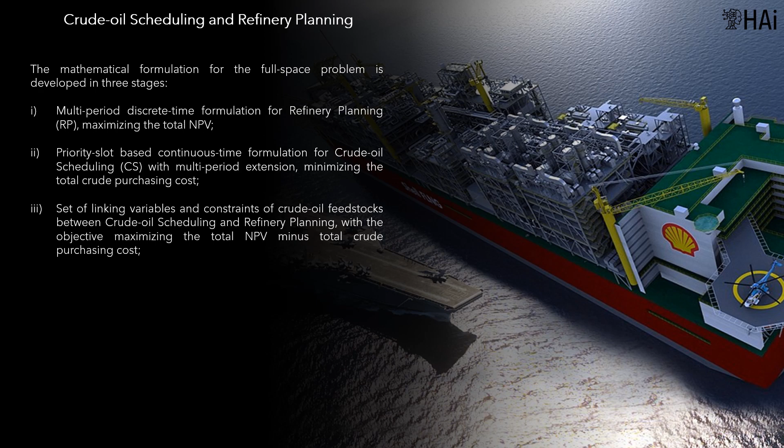And a set of linking variables and constraints of crude oil feedstocks between crude oil scheduling and refinery planning, with the objective of maximizing the total NPV minus total crude purchasing cost.

The custom indicates that the most common position, when formulating a mathematical model, is an integral formulation, full space, which brings together in a single formulation all the equations that define the problem. This corresponds to a top-down approach. In this case, the model could be called the Crude Oil Scheduling and Refinery Planning Model.

However, considering the evolution of computational power and algorithms, today an ascending formulation is indicated, starting from the atoms, that is, from the basic parts of the problem. This corresponds to a bottom-up approach.

The case presented is a good example of this approach, dividing the problem into 2 formulations: the Crude Oil Scheduling Model, and the Refinery Planning Model. These formulations are integrated to form the holistic model.

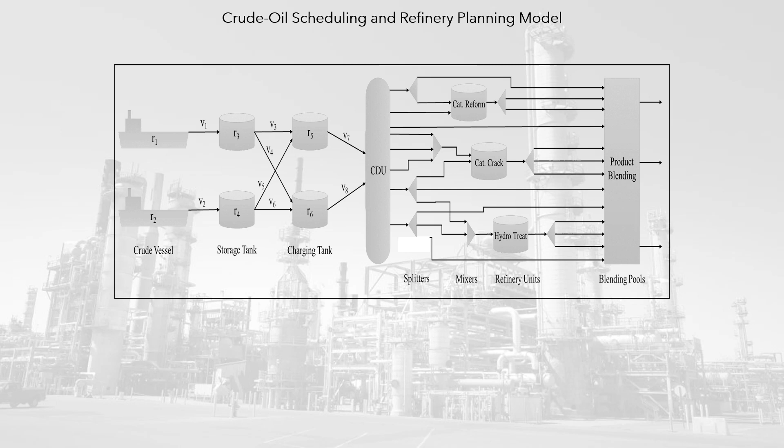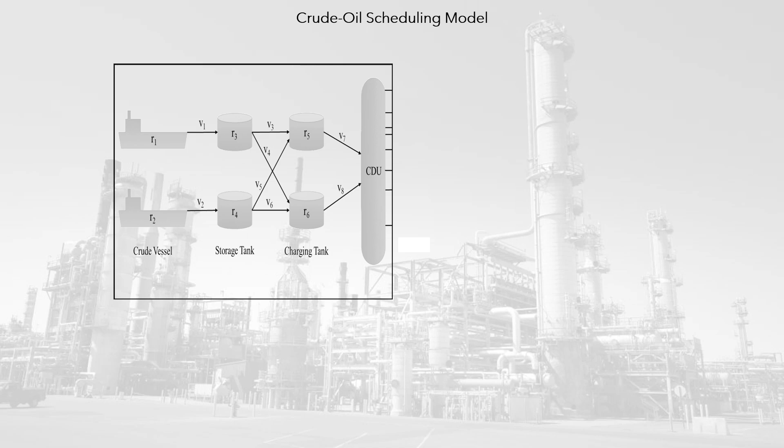The Crude Oil Scheduling Model represents the first part of the process. This type of scheduling problem is usually formulated as continuous time models, which facilitates the coordination of activities exactly at the instant level. The Refinery Planning Model is more oriented to the use of discrete time formulation, since it involves the planning of activity volumes in multiple process units by periods. Proper handling of these 2 formulations is easier under the divide and conquer approach.

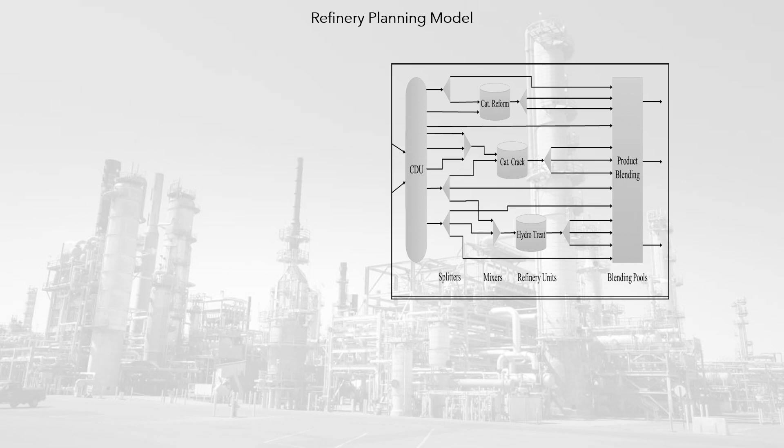The graph shows the flow rates in the simplified refinery planning example. The goals of the 2 models are crude oil scheduling and refinery planning.

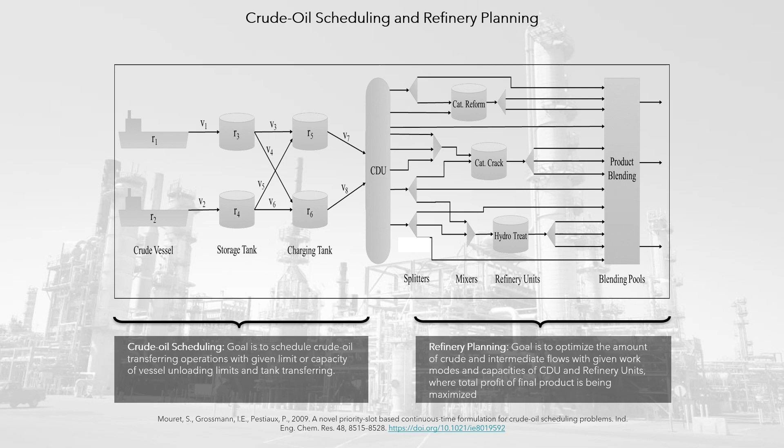The goal is to schedule crude oil transfer operations, with a certain limit for ship unloading capacity and tank transfer, and refinery planning. The goal is to optimize the amount of crude oil and intermediate flows, with working modes and capacities given for the CDU and the refinery process units, where the total benefit of the final product is maximized.

The crude oil scheduling model is a continuous time non-convex MINLP model, based on priority slots. Its main features are given vessel arriving and leaving time, tank inventory management, CDU charging continuously through time, and non-overlapping inlet and outlet transferring. The key variable is the binary variable ZIV, that represents the assignment of the V operation to the priority slot I.

The key constraints are: time decisions in each time slot must have consistency, non-overlapping operations not in the same slot, non-overlapping time decisions ensured by big M type constraints, nonlinear crude composition constraint for each slot I, crude C, and outlet operations V, and other mass balance constraints. The objective function is the crude cost.

The key constraints are: time decisions in each time slot must have consistency, non-overlapping operations not in the same slot, non-overlapping time decisions ensured by Big M type constraints, nonlinear crude composition constraints for each slot I, crude C, and outlet operations V, and other mass balance constraints.

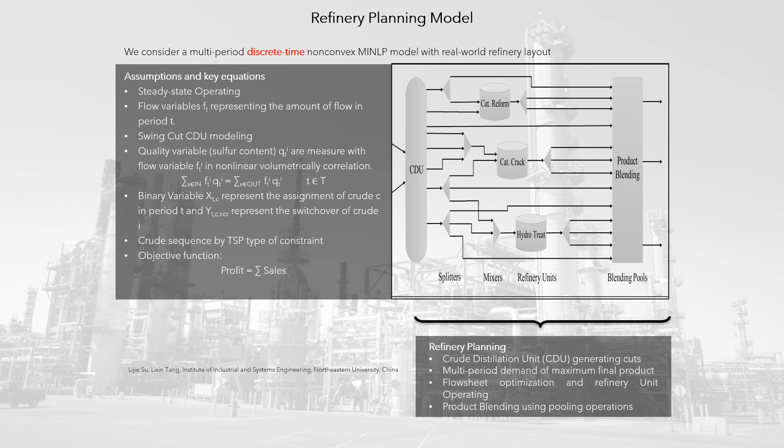The objective function is the crude cost. The integrated problem, or full space problem, is a non-convex MINLP.

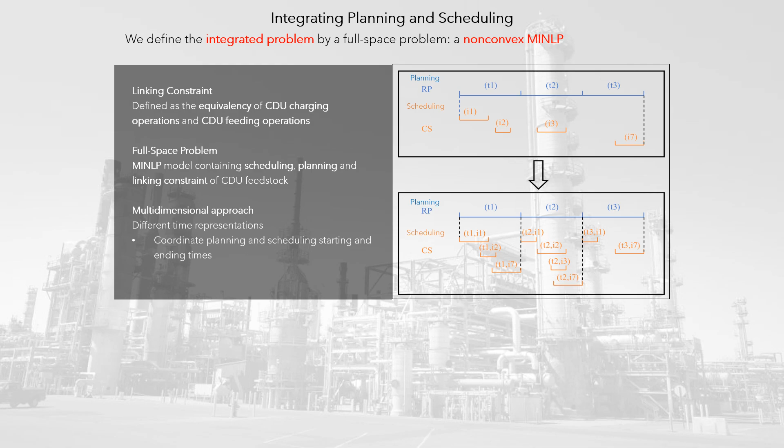The full space problem is an MINLP model containing scheduling, planning, and linking constraints of CDU feedstock, with a multidimensional approach using different time representations to coordinate planning and scheduling starting and ending times.

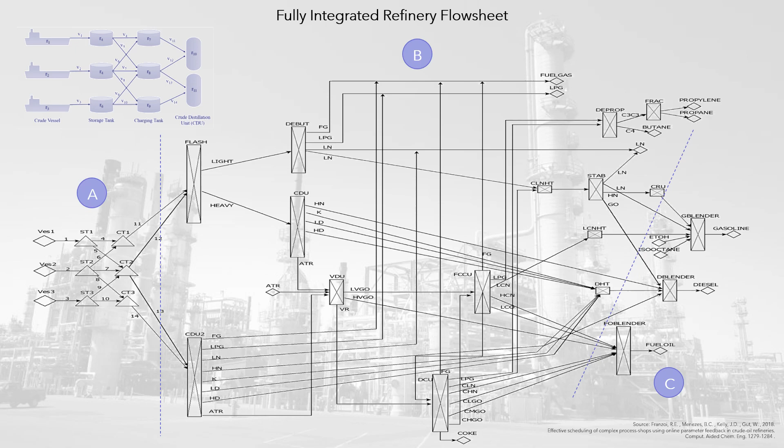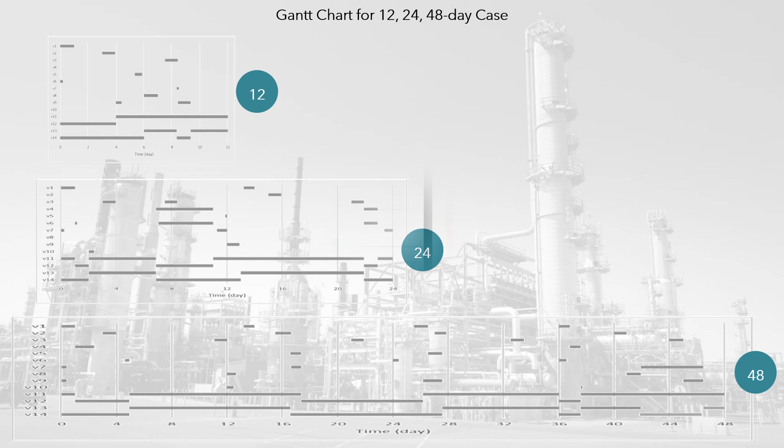Three different solution approaches were studied. The monolithic approach solves the full space model using state-of-the-art MINLP solvers.

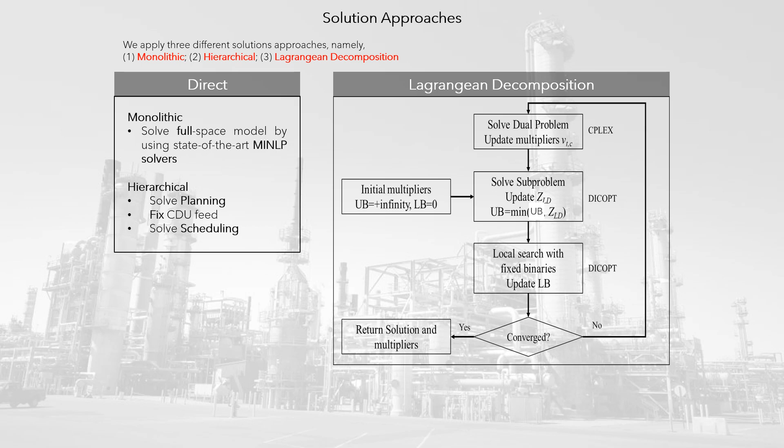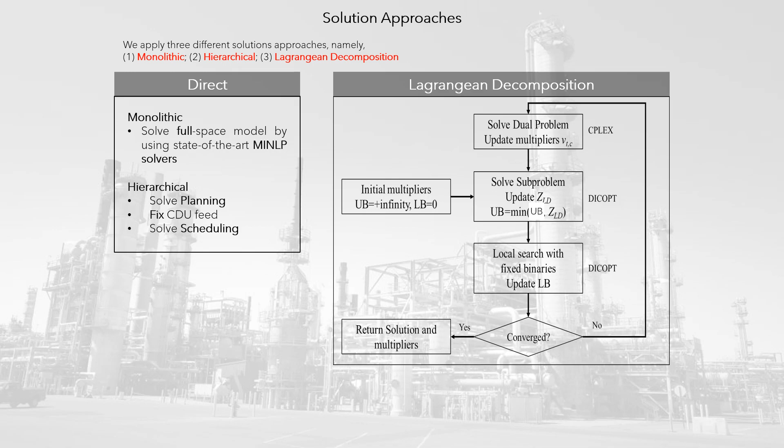The hierarchical approach solves sequentially the two sub-problems: CS, crude oil scheduling, and RP, refining planning. There are two possibilities: the proposed method solves planning, fixes the CDU feed, then solves scheduling; or Lagrangean decomposition.

For the monolithic approach, the different alternative solutions come from the state-of-the-art MINLP solvers used.

For the hierarchical approach, the sequence of solving the two sub-problems, CS and RP, is a key decision. Both methods are tested in 3 cases and the computational results are presented in Table 10.

The two options are stated as scheduling-planning and planning-scheduling, which explicitly represent the sequence applied for solving CS and RP. The objective value is determined by the sum of the individual CS and RP objectives.

This process could be improved if cycles are incorporated to achieve convergence.

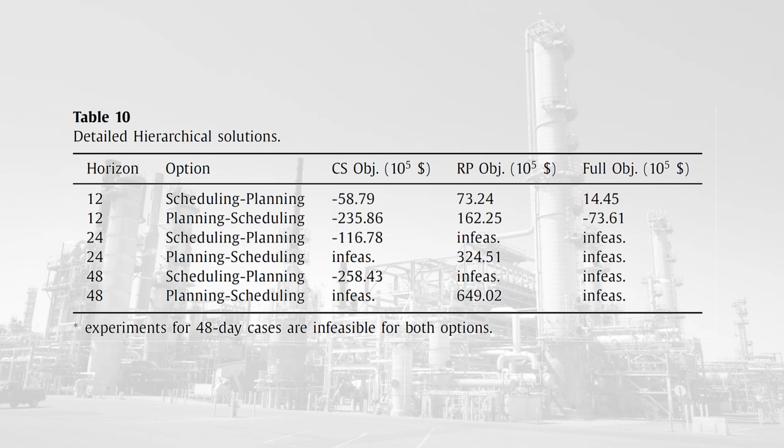This can be considered a primal-dual algorithm that uses an improved subgradient formulation for the dual problem by exploiting a trust region approach.

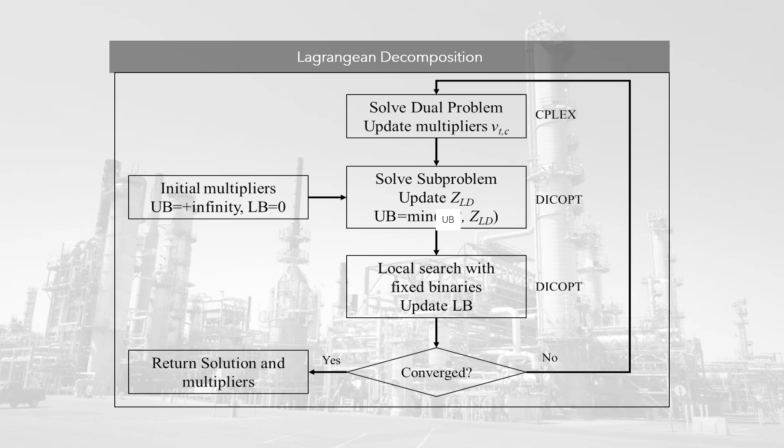Because of the non-convexity of the problem considered here, strong duality is not guaranteed, and therefore there might be a gap between the global optimal solution and the Lagrangian dual, which this algorithm may not be able to reduce to zero. The overall solutions of the 3 cases, 12 days, 24 days, and 48 days, are presented in the table.

The objective functions for both the monolithic and Lagrangean decomposition approaches are larger than for the hierarchical approach, by 75%, 60%, and 6% for the 12 day, 24 day, and 48 day cases respectively, corroborating their advantage.

Moreover, the proposed LD approach requires less CPU time, converging to a small 1% to 5% optimality gap, when compared to the monolithic approach using state-of-the-art MINLP solvers.

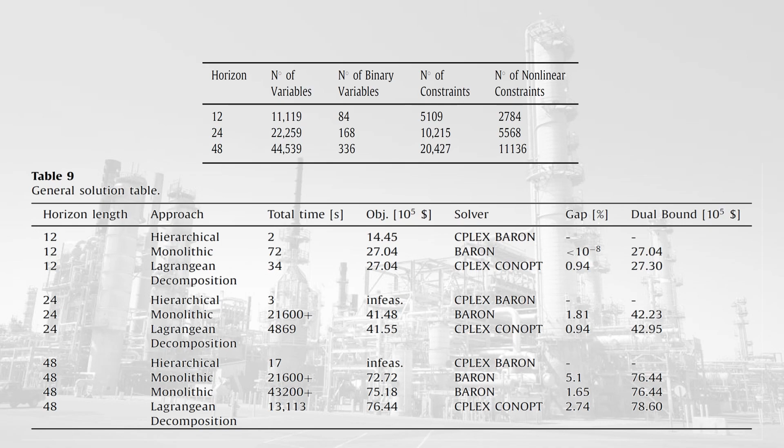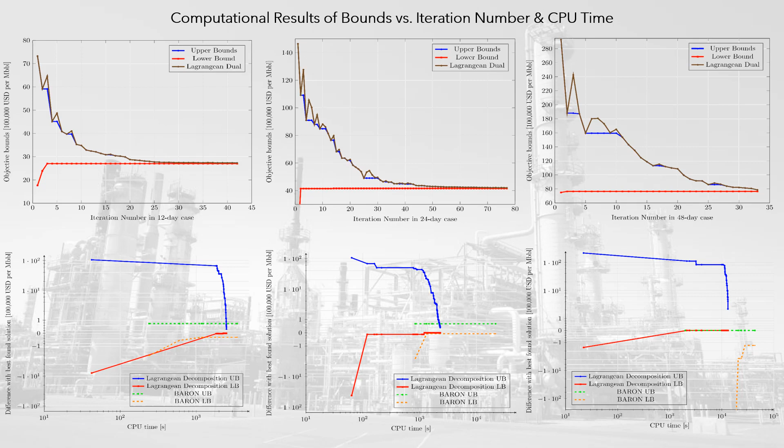The graphs present the computational results of bounds versus iteration number and CPU time, comparing the Lagrangean decomposition method using CONOPT versus the Baron global algorithm.